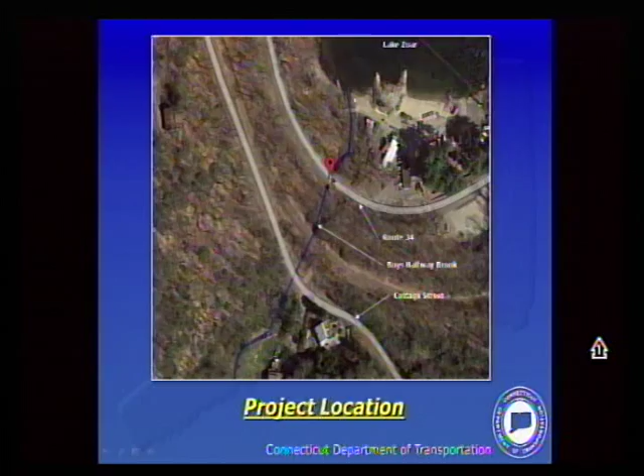And here's the location of the bridge. Let me use the mouse. Here, this is Route 34, and that's the location of the bridge marked in red. Now Joseph is going to go over the existing and the proposed condition of the bridge.

Thank you, Leslie. Again, my name is Joe Solis, and I'm with A.D. Caesar Associates. At this time, I'm just going to give a brief description of the project. Project number 84110 is, like Leslie said, the rehabilitation of bridge number 2265, Route 34 over Boys Halfway Brook here in Monroe. The bridge is located on Route 34, just west of the Stevenson Dam.

This is a photo of the inlet of the bridge, or the south elevation of the bridge looking north. For this project, the superstructure, or the upper portion of the bridge, will be replaced, and the abutments, or the portion that supports the superstructure, will be maintained with minor modifications. This is the portion that's going to be replaced, and these are the abutments that support the bridge - those are going to stay in place.

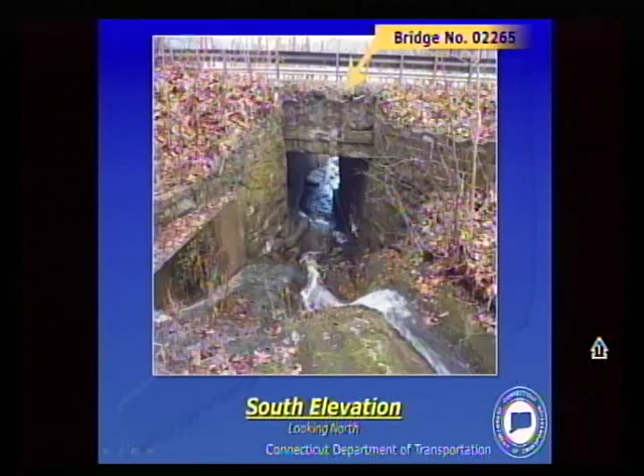Regarding the existing bridge, the bridge was built in 1915 and it was reconstructed in 1930. It's made up of a reinforced concrete slab which supports fill, and the fill supports a bituminous wearing surface. The concrete slab superstructure is supported by stone masonry abutments as well as concrete abutments. The total overall length of the bridge is 13 feet, and the bridge has a 9-foot clear span.

The bridge measures 30 feet curb to curb, which includes right now, the existing bridge includes 2 11-to-12-foot travel lanes and 2 3-to-4-foot shoulders. The overall measurement of the bridge is 38.5 feet, and the average daily traffic on Route 34 at this location is 9,800 vehicles per day.

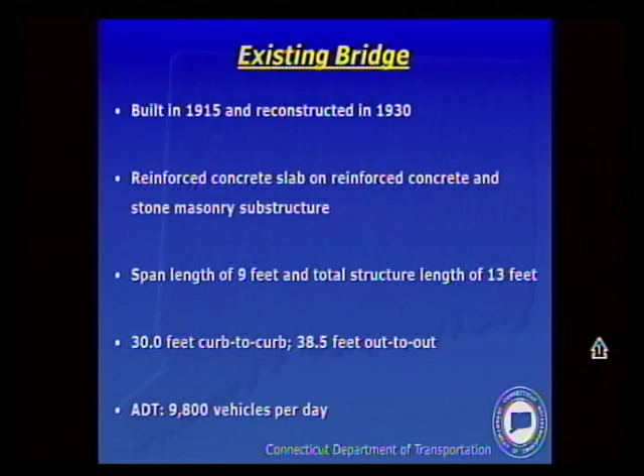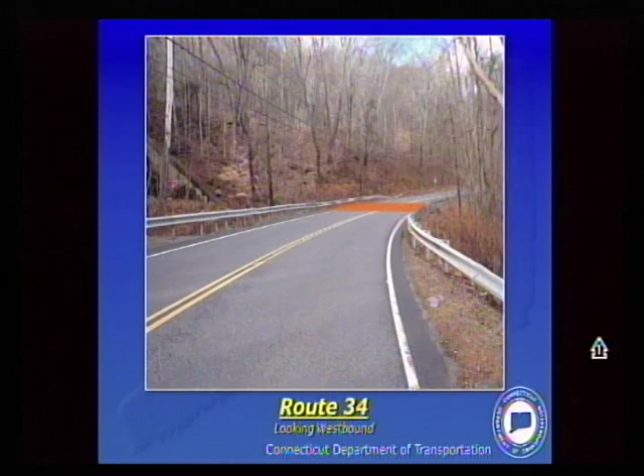This is a view from Route 34 looking westbound. What's highlighted there in orange is actually the location of our bridge. Lake Zoar in this picture is to the right.

This is a view from Route 34 looking eastbound. Lake Zoar in this picture is to the left. What's highlighted there in orange is the location of the bridge, and the Lake Zoar Drive-In is just past the bridge on the left. That's the restaurant that's in this area.

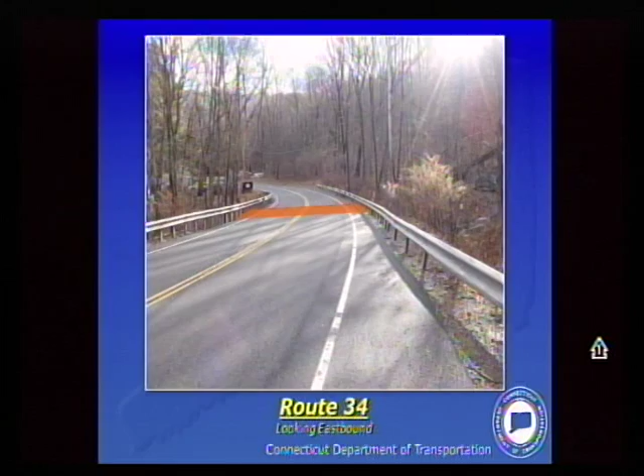The bridge is showing signs of deterioration, and many of these deteriorated areas occur at the midspan of the bridge, which is a high stress zone. This is the reason we're replacing the bridge.

The slab exhibits cracks and spalls with efflorescence and exposed reinforcing. These are some of the photos of the defects. The photo on the left shows cracks on the underside of the slab with efflorescence. The presence of efflorescence just means that water is getting into the slab and it's making the efflorescence come out. And once water gets into the slab, it starts corroding the reinforcing, which causes the reinforcing to expand and causes the concrete surrounding the reinforcing to crack and spall. Pictured on the right is an actual spall with exposed reinforcing and efflorescence.

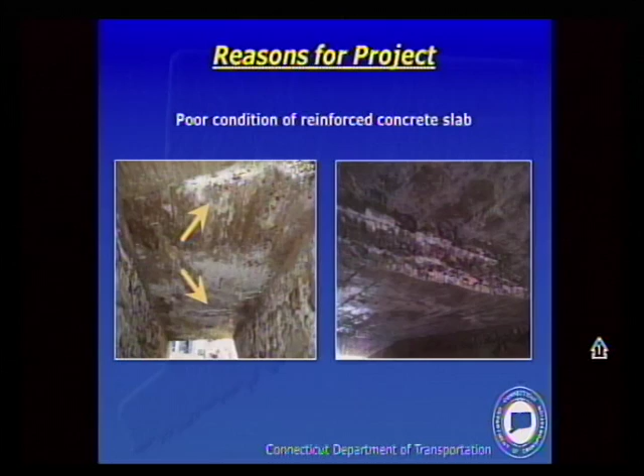Regarding the proposed rehabilitation, the proposed bridge will maintain relatively the same footprint as the existing bridge. The existing slab will be replaced with a new reinforced concrete slab. The roadway will be widened to accommodate 2 12-foot travel lanes and 2 5-foot shoulders. The bridge will be maintained, or will be supported on the existing foundations with slight modifications to the existing abutments.

We actually found that there is 2 feet plus or minus of fill that will not need to go back. It's just fill that will be taken out, so that allows us to raise the bottom chord of the bridge.

Also, there will be 2 stages of construction. During both stages of construction, traffic will be maintained using alternating one-way traffic to protect the traffic during the course of the project.

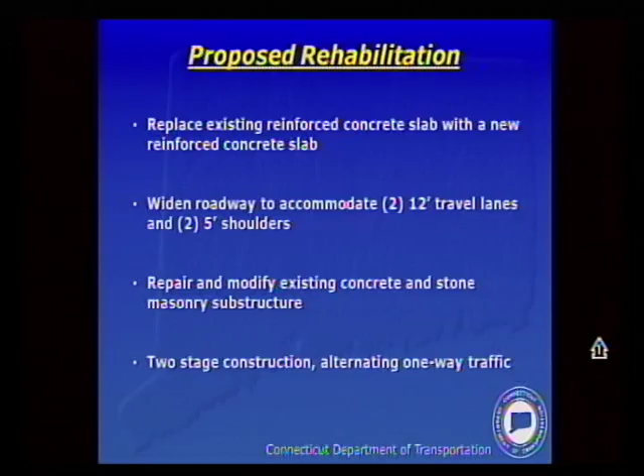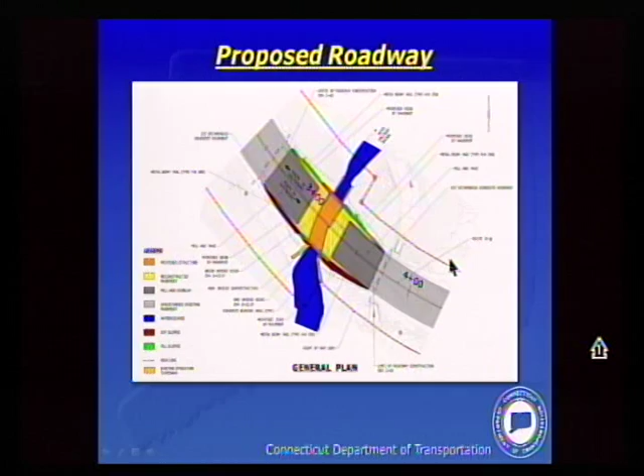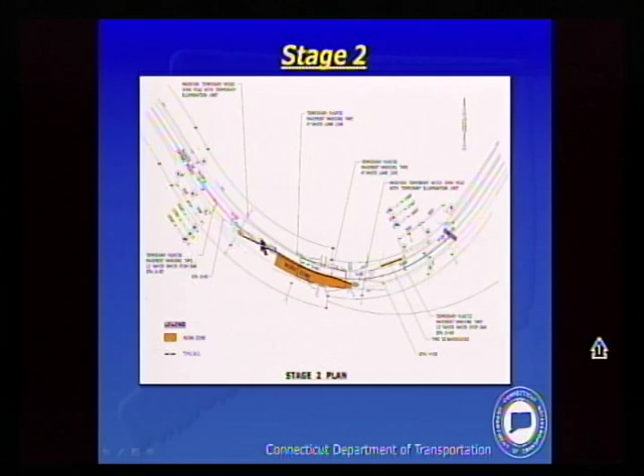During stage 2 of the construction, traffic will be shifted to the north, which is this area here, onto the newly constructed bridge, and the southern half of the existing bridge will be demolished and reconstructed. The southern half is, again, the area shown in orange, called out as the work zone.

During this stage, again, traffic will be maintained using alternating one-way traffic, and temporary traffic signals will be placed at both ends of the work zone. And again, temporary precast concrete barrier curbs or jersey barriers will be placed along the work zone to protect the work zone and traffic. And again, during the stage, we will be mindful of maintaining access to the driveways of the local business.

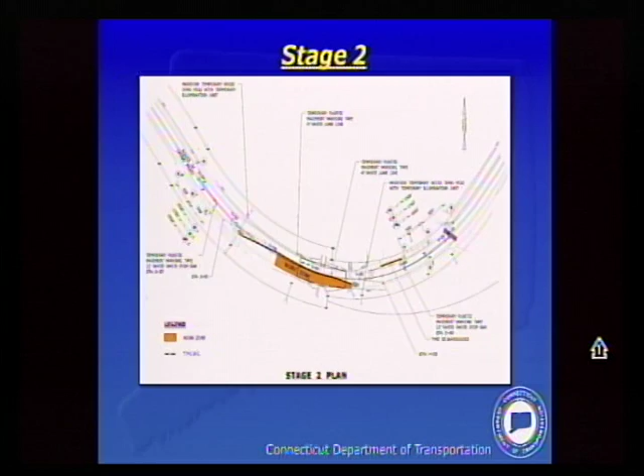Regarding environmental permitting, the following environmental permits are anticipated: we will need an inland wetlands general permit, as well as an Army Corps of Engineers Category 1 permit.

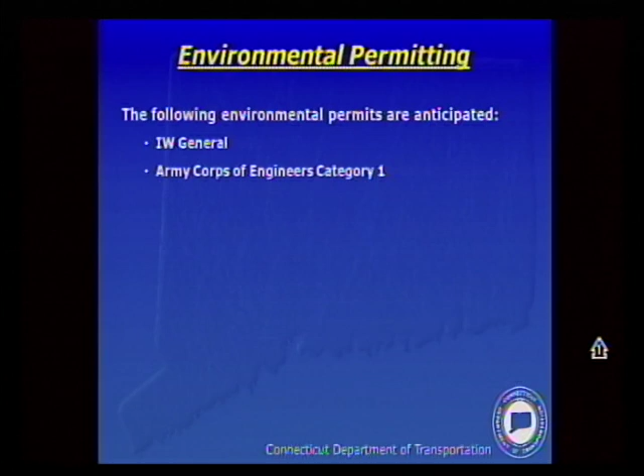Regarding utilities, there are no utility impacts anticipated for this project. There are some aerial utilities just south of the bridge, but the lines as well as the poles are far enough away that they won't be impacted, and they won't be impacting the construction.

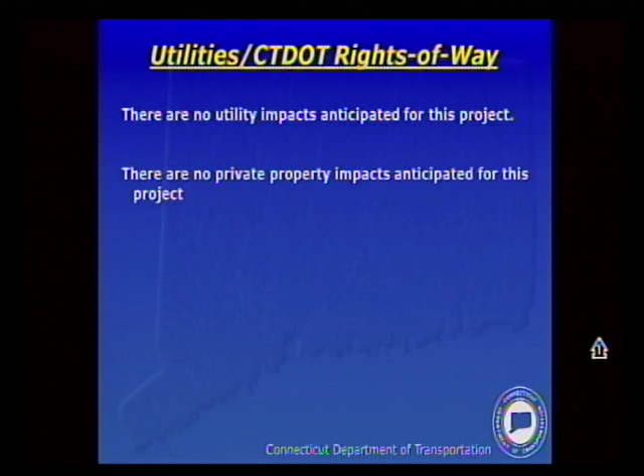Regarding rights of way, all of the work that's going to be performed for the rehabilitation of the bridge will be performed within state property, so there are no private property impacts anticipated for the project. At this time, I'm just going to turn it back over to Leslie.

The construction for this project is expected to start in the summer of 2018. The estimated construction time is about 5 months, so one construction season. The cost is about $700,000, and right now it's all state funded.

At this point, we conclude our presentation, and now we open it for comments or questions.

Okay, let's start with this. If you go back to the proposed plan, the first one there, you've got a jog right in the middle of the bridge. I think what happened was there was two at one point, it was probably widened. The bridge is probably at one point half as wide, and they extended it. One half of the abutments are the original masonry abutments, and the other half of the substructure is actually concrete. So the bridge at one point was widened.

So we're actually reusing the existing abutments because they're in good shape. We're not replacing them. That's not going to cause any turbulence with the water going through there, you know, when you've got a jog like that. Actually the flow goes up.

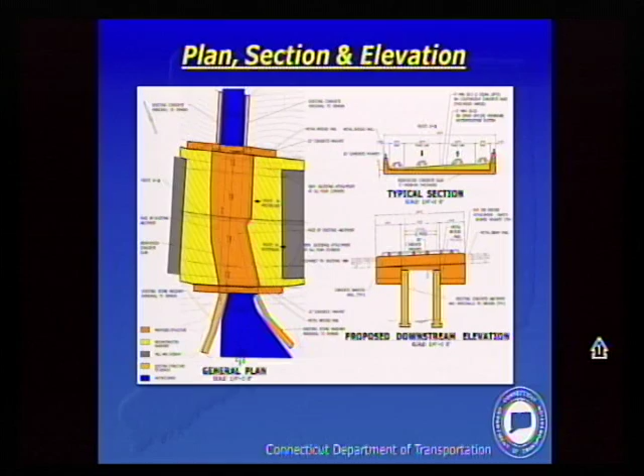Yes, I'm a local historian on Stevenson Dam, so I want to tie in some issues. I was at the last meeting for that many years ago.

There's two basic thoughts about the bridge going through the water or remotely maybe skimming alongside the dam. If those happen, that's an interesting question, will this bridge be no longer useful? And will that Route 34 bypass this bridge? I noticed you've got the same footprint. You said there's no future growth plan in this particular construction. Can you comment on that?

I'd like to keep the comments based on this bridge. We're basically correcting a deficiency in this particular bridge. I know that other project is an ongoing project being looked at in the very early stages, and I don't believe a decision's been made whether it's upstream or downstream. If you're making a new roadway to connect to a brand new bridge, and it happened to impact this bridge, then I think my question is pertinent as a taxpayer.

Well, of course, obviously, as this project moves along, you want to know whether this bridge is going to be in the old plan or the new plan and not throw away the tax money. I know other bridges have only been restored because of cost issues, not expanded, like the one down by Big Y. I made some inquiries down there. So my question is valid. Well, I'm sure it's valid.

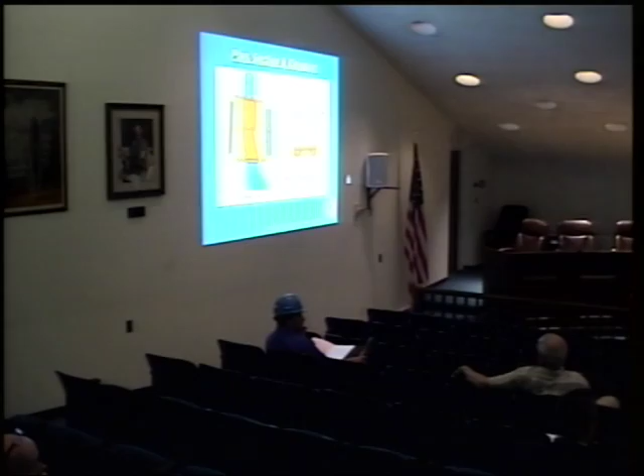Hi, I'm Dawn Fair, I operate the marina Brian was referring to. Our concern is when it would happen and how it would impact traffic flow coming in. The marina is a seasonal business, so in summertime it would be awful to have boats stopping as they come in to launch. The snack bar, on the other hand, is a year-round business, so we wouldn't want that impacted by people not being able to access it.

Another concern is as you're coming down right where that bridge is, the curve -- so many people, because they're speeding but still, the way the road curves, have gone into the guardrail and had multiple accidents. As you're doing this work, it would help if it's more accessible and the visibility improves, because of that curve and the trees.